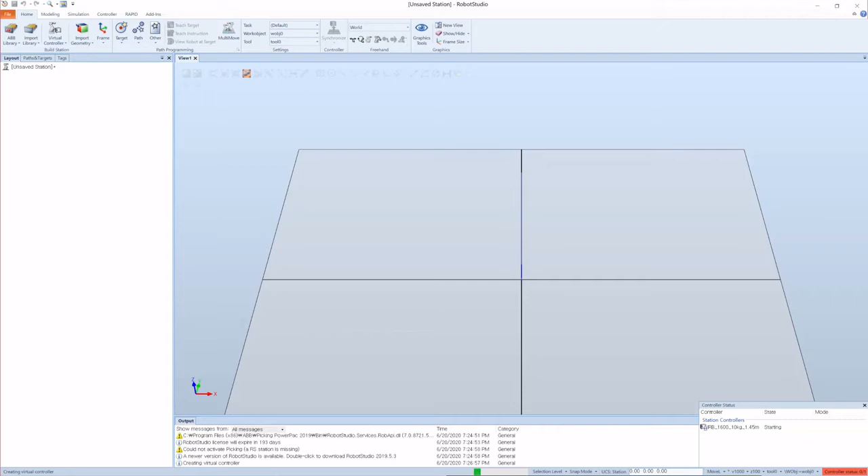So we have a Robot Studio here. Let me just make it bigger. As you see here, this is the controller. It says starting. When the controller is ready to use, there will be a green color in the controller status. So we have a robot and the controller is also started.

Let's see the basic function. Here we have the ABB library, from where you can select various kinds of equipment, the robot itself, conveyor belts and other things.

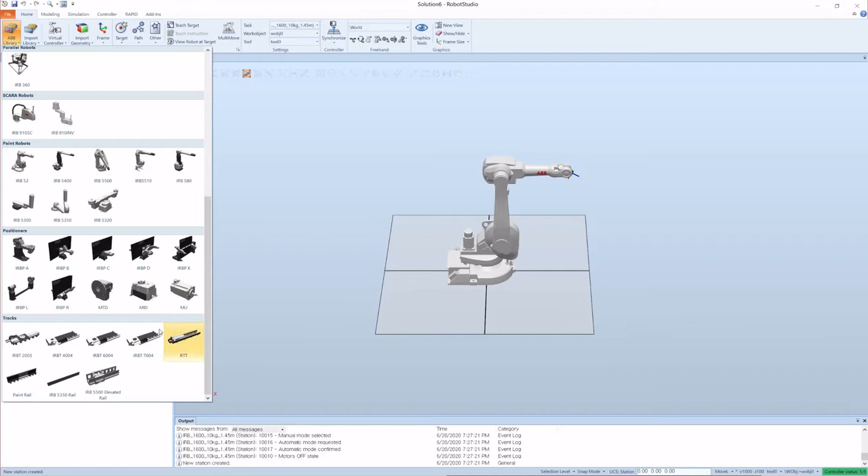We also have import library and equipment. In here you can select to make a more real environment with the controller, and any other stands, flex pendant, or other things.

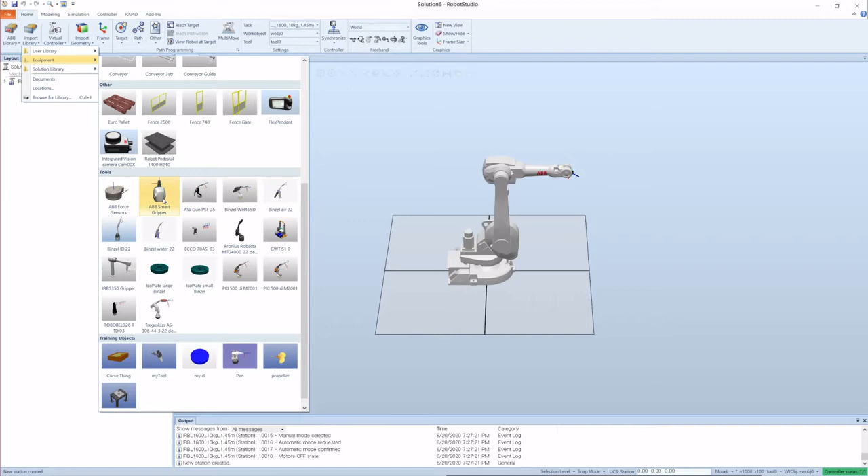What I will do is select this smart gripper, and you can choose the way you want. Servo means this one, the main body, and servo and fingers means it has the fingers, and you can select other things according to your project. So I will select for now the servo finger. I'll say OK.

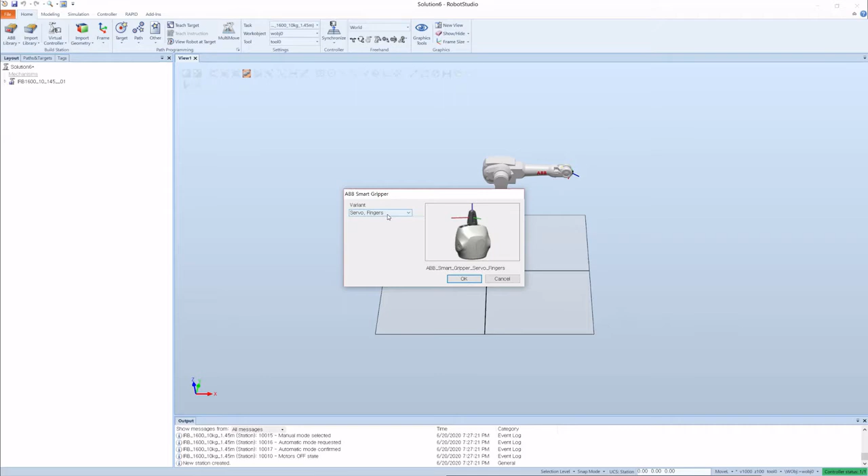So on the left we can see that this one is the robot, and this here is the servo. It is hidden below.

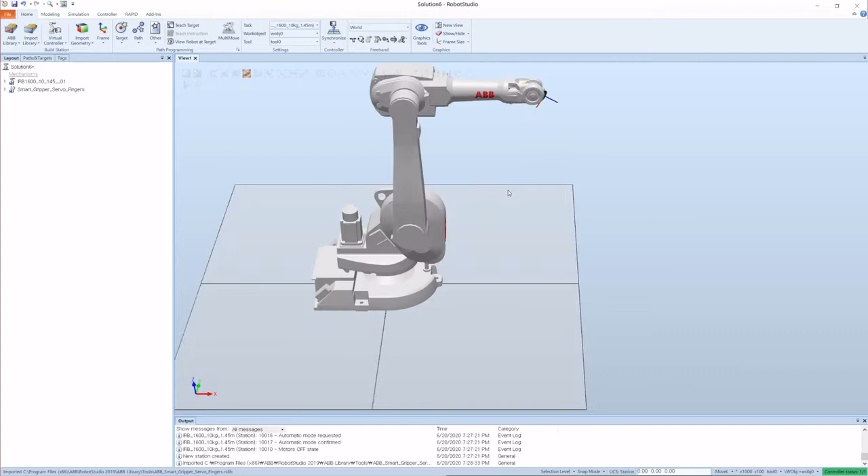To move the model in Robot Studio, I just do the scrolling, nothing more. When you scroll, you can zoom in and out. If you want to rotate the robot, you have to press Ctrl Shift at the same time with the left click, then you can rotate the Robot Studio model.

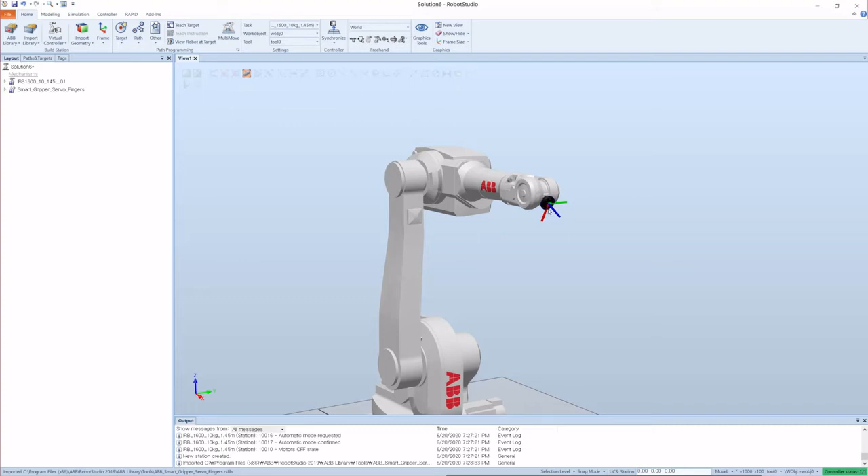And on the left here, this one is the axis. They give three colors. For example here, the blue axis is on the up, and here you can compare the axis - the blue axis is on this side, and this will become handy for later use.

And we have a virtual controller. That means you can add some other new controller also with the robot or without the robot. But without the robot, the controller is unuseful.

And here we have import geometry, so I will talk about this in the next tutorial. We also have the frame, create frames, and that might be another new tutorial.

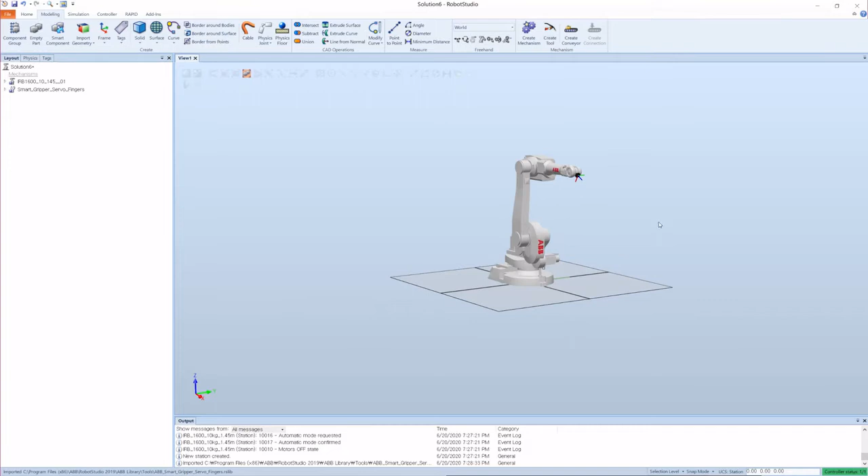We have modeling here, so you can make some basic models in here, but I recommend making models in other 3D maker software like SketchUp or Rhino or SolidWorks, and then import the models into Robot Studio. That will be more useful.

But if you need some basic elements, you can make it right now in here - like a box, cone, cylinder, pyramid, sphere - and also you can make some surfaces in here. We have a curve tool, so you can make one-dimensional or two-dimensional curves, polylines, etc. This is very useful if you are making a path.

Actually we don't usually do that, the robot will itself make a path, but sometimes you need a designated path, then you can have those kinds of lines. We have some other things in here that we will use from time to time. So the one thing I will explain is here.

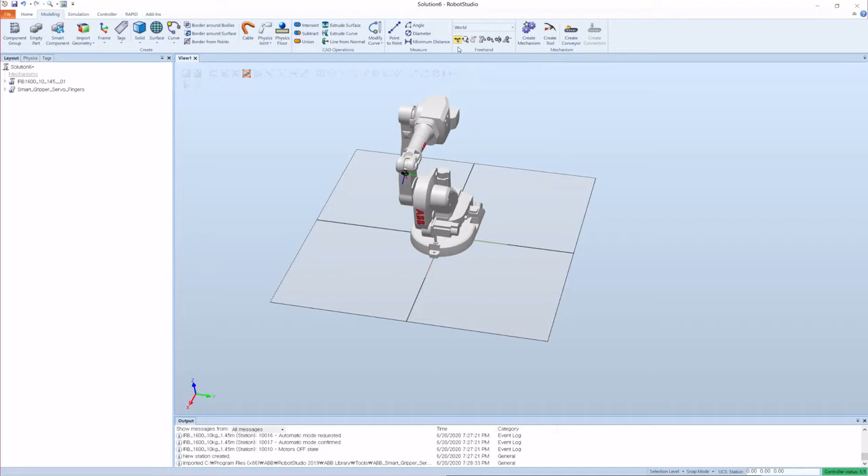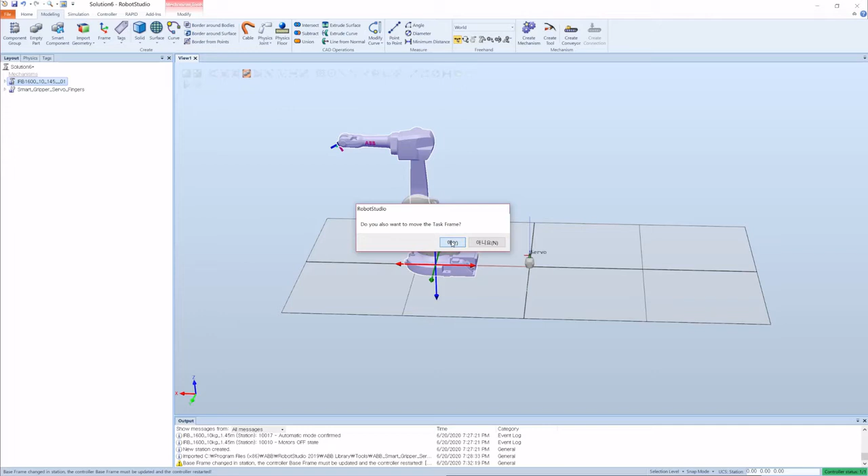So this one is for move. When you select this, let's not move the robot right now, because if you move the robot and forget something, let's see what happens. If I move the robot, it asks do you also want to move the task frame? If I say no by mistake, then later when making the path or doing animation, you cannot precisely pick up from the designated places. So either you say yes, or don't move the robot at all, just move the other body, so you don't have to worry about that. Or if you want to move the robot, you have to move the task frame also. So I said yes, but I'll just do Control Z.

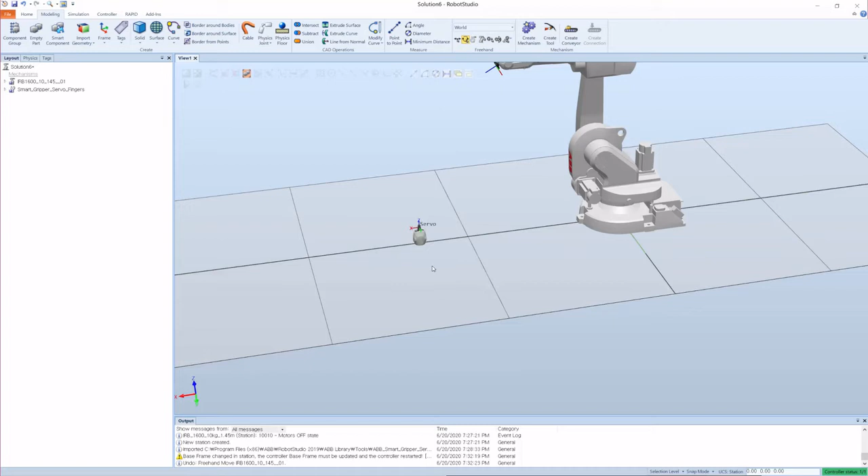So for now, let's use this one. So I move the gripper. Another option here is rotate. If I want to rotate this one, it asks if you want to rotate from here, because there is a world option. If I select local, then you can rotate it around here. And we have other options which we rarely use, as far as I know.

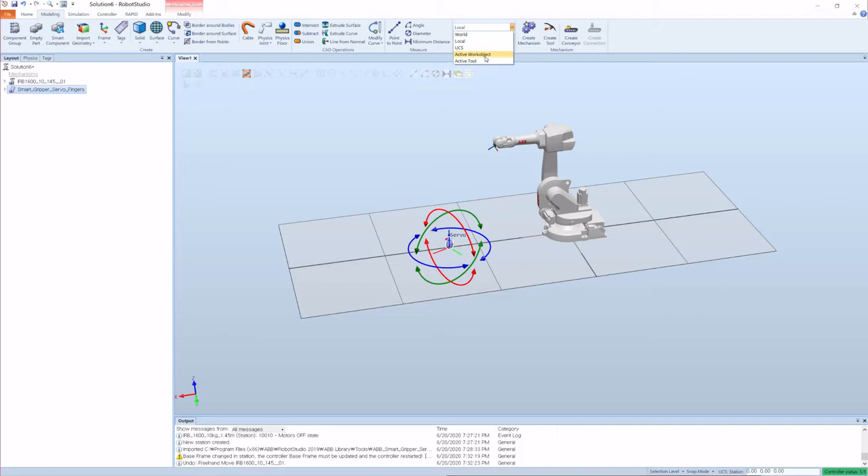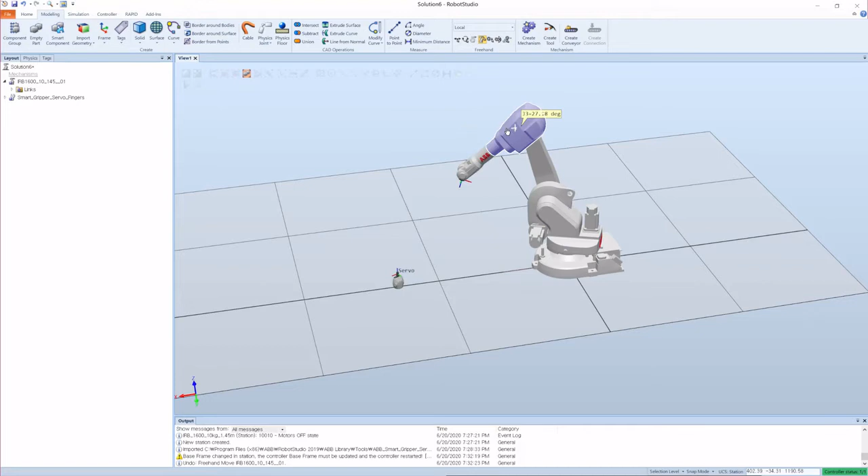Another thing I'll explain is drag. You can drag some objects in from here, and another one is jog joint, which means you can easily jog the joints the way you want to position the robot. For each axis, you can have either vertical movement or another axis the robot can really move. Let's not make it too complicated, but you know the drill.

Another one is jog linear, and another is jog reorient, and we have a multi-robot jog. This needs two or more robots.

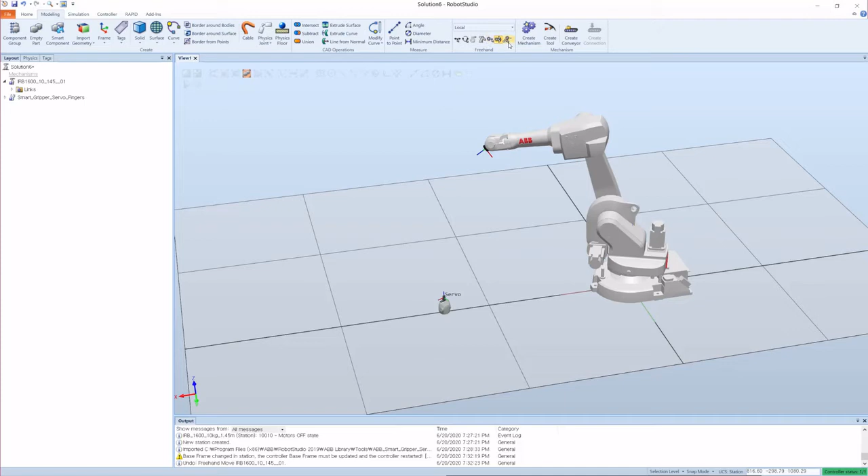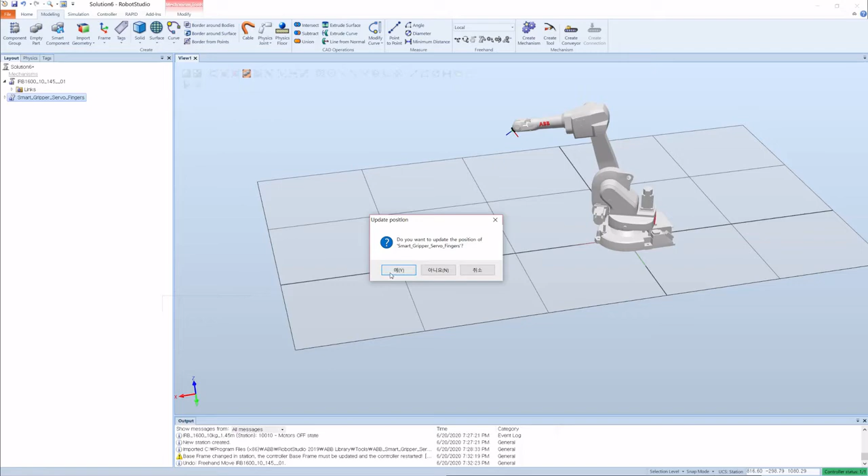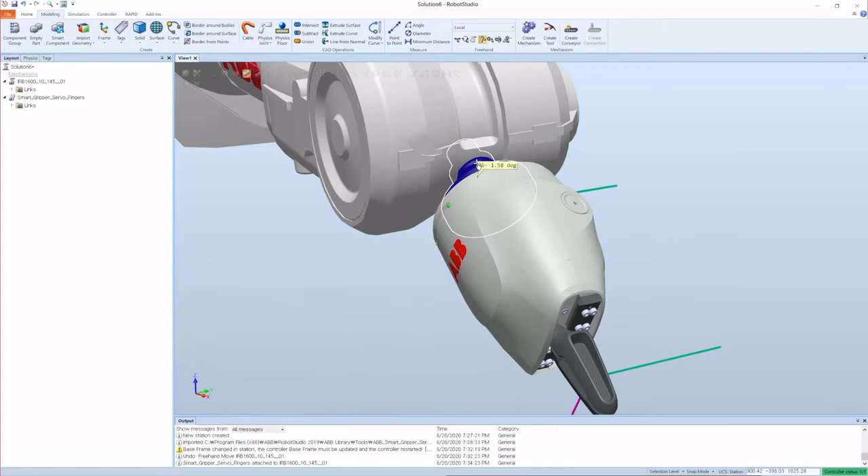Now let's connect this gripper with the robot. To do that, I'll just right click, select attach to, and select the robot. Do you want to update the position of the smart gripper? Yes. So we have our gripper in here, and if you select this one, you can actually do stuff with it the way you want, however much you want, right? And also you can open the gripper or close it.

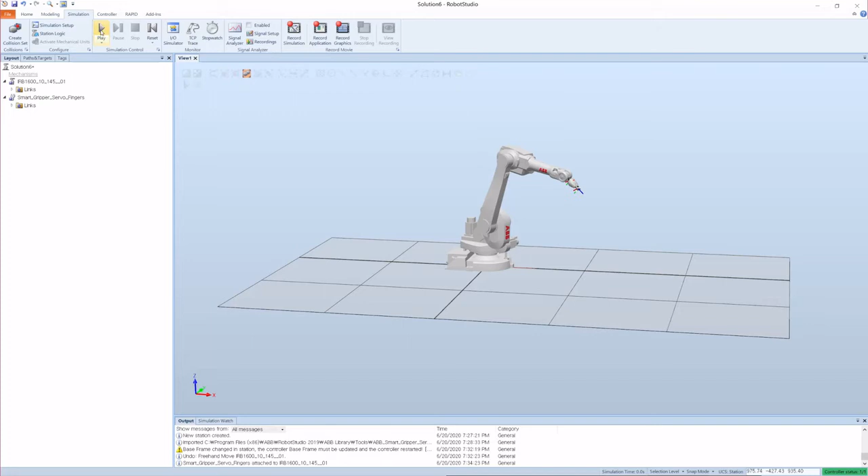So this is it with the modeling, and we have a simulation, so you can record the simulation from here. And this is for playing the simulations, which will be explained again and again later with other work. We have a controller here, and we have rapid. Rapid means that it's directly connected with the program, so when you start to really make points, then you will use rapid.

So here at the main module, this is the programming place, which we can do by the flex pendant or by using rapid. For now there is nothing here. We have a place to start our programming in here. This is the entry point of your program. So we don't have anything here, there is nothing.

Here at the Add-Ins you can add different plugins or robotware, like insert package. If you want to add robotware, you choose which robotware you want, and if you want other stuff, you can easily download it from here.

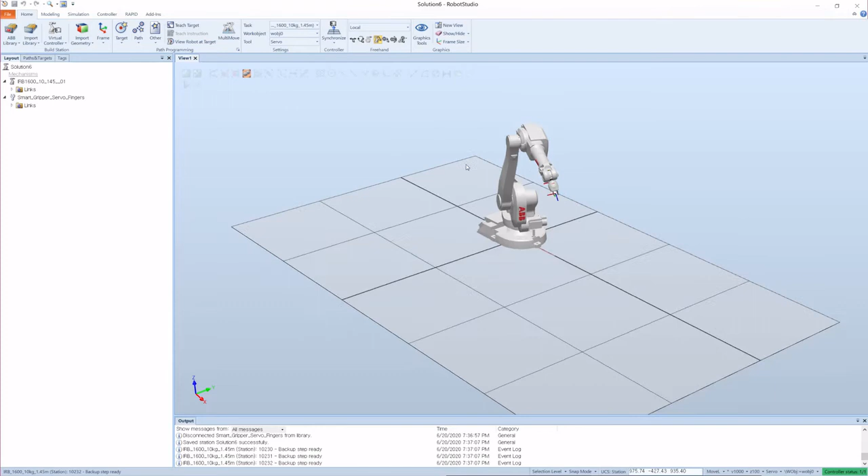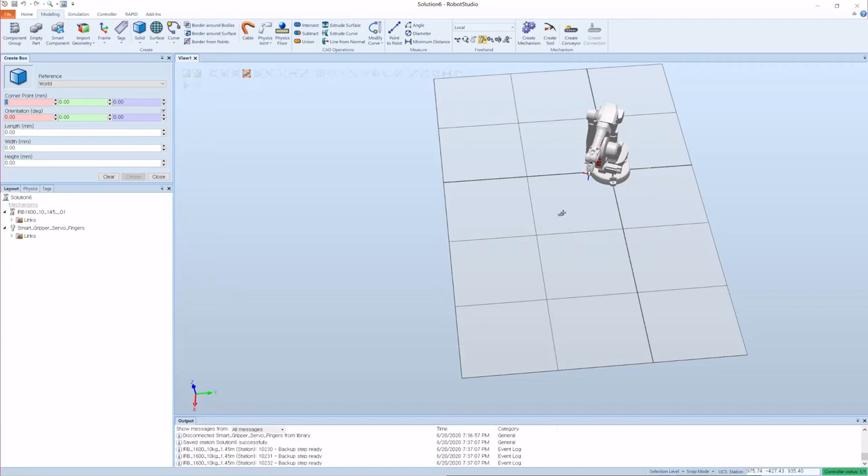Now let's make a box. So to make the box modeling, here we can make a box. The corner point is, it says we can either write here the x value, y value, and z value, or if we know where to put the box, then we can just select it after here. And if I select here, then it already automatically puts the designated place in there.

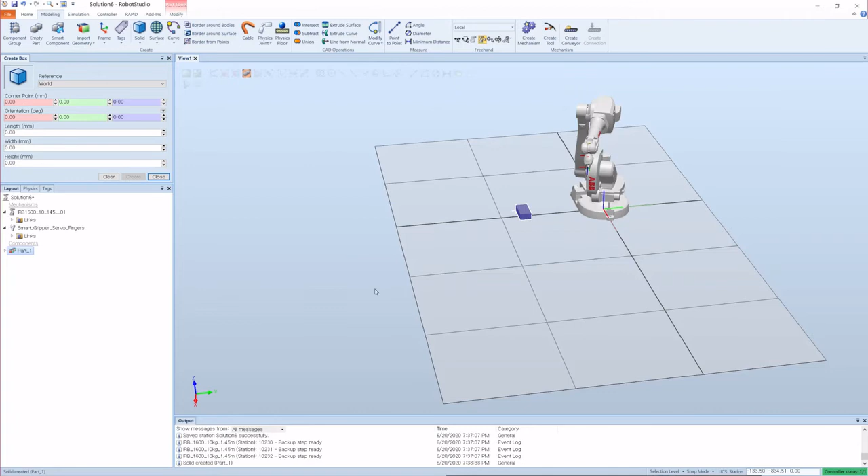So our length of the box, let's make a brick. It's gonna be 220, and the width will be 110 and 65, and we say create. So we have a brick here, and we can edit our name by renaming it, brick space 1. So this will be brick 1.

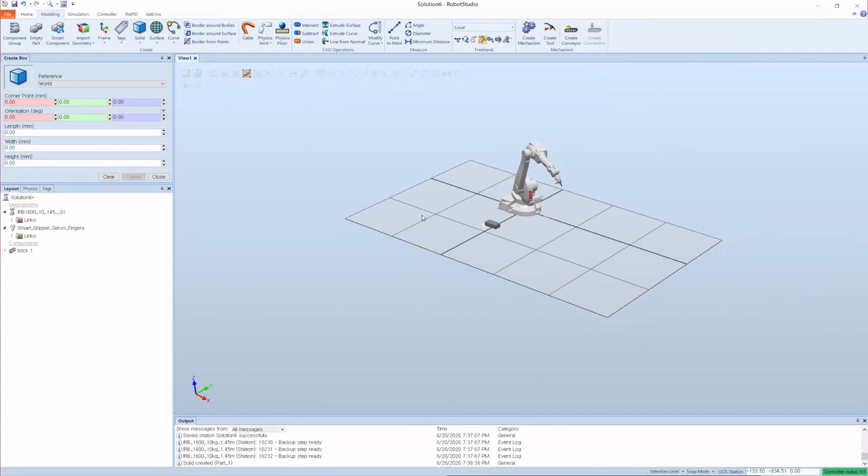After this let's just move with one path for this tutorial, and later we will use the pick and place. Another thing is, in RobotStudio you can pick the real object to make the animation, but if you are using the real robot and you need the workflow, then you really don't need to pick the objects in the animation. Rather, using the gripper and input output device is more important, as I know.

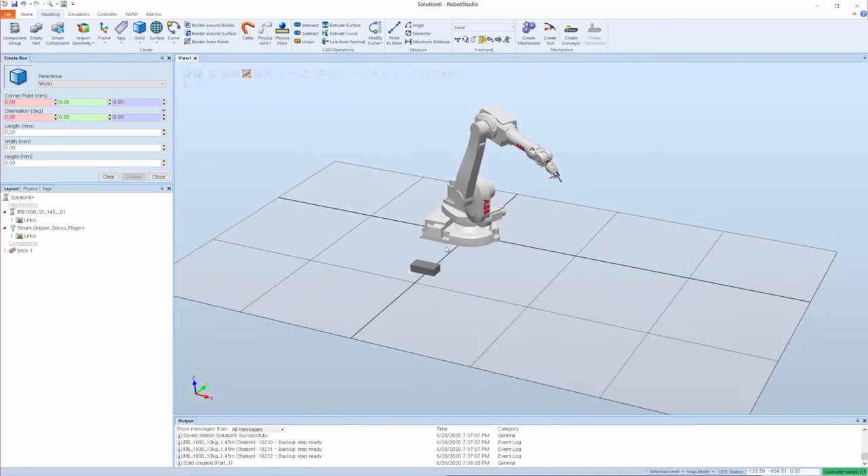So if you want to make the starting points in here, in home, if I do the teach target, then there will be a new target in here. So how can we see this? I'm gonna close this. In path, this is our robot. These are the targets, and when I click in here, as you can see, this will be highlighted. So target 10 will be this one.

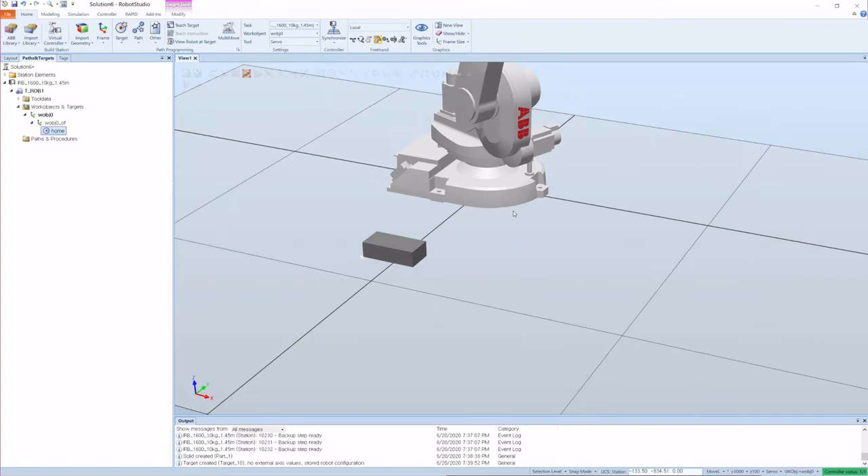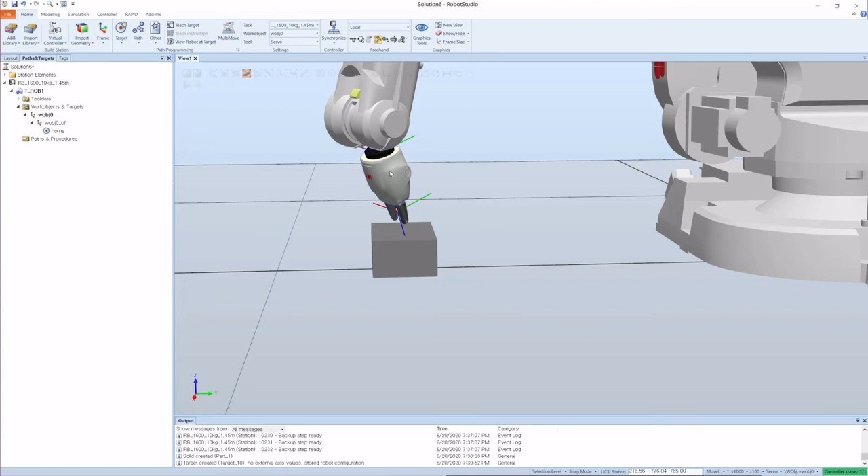So I will just rename it as home. This is home. And if we want to make another target in here, either we will jog it like this and rotate it, do this kind of stuff and make a target, which is okay, but the problem is you cannot exactly make it vertically 90 degrees when the gripper is picking up the target. So I will not recommend that.

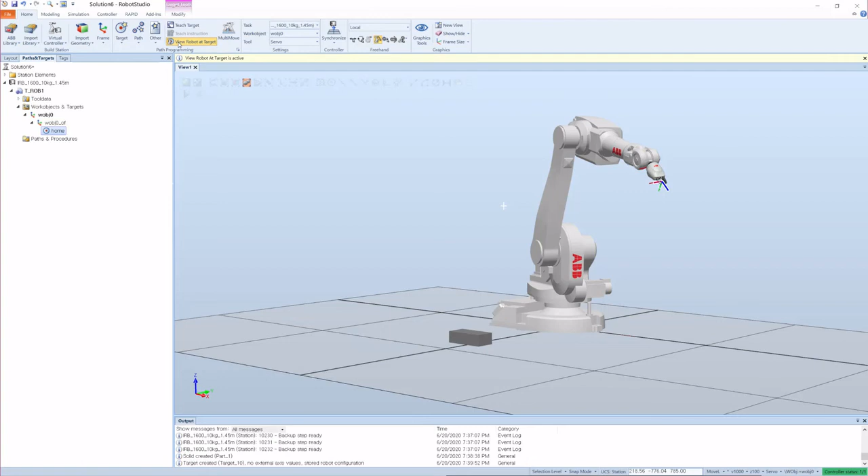So if you feel like you messed up with all the jogging, then you just click your home button and in here View Robot at Target. So what this may do is take all the robot in the same positions when it was in the target.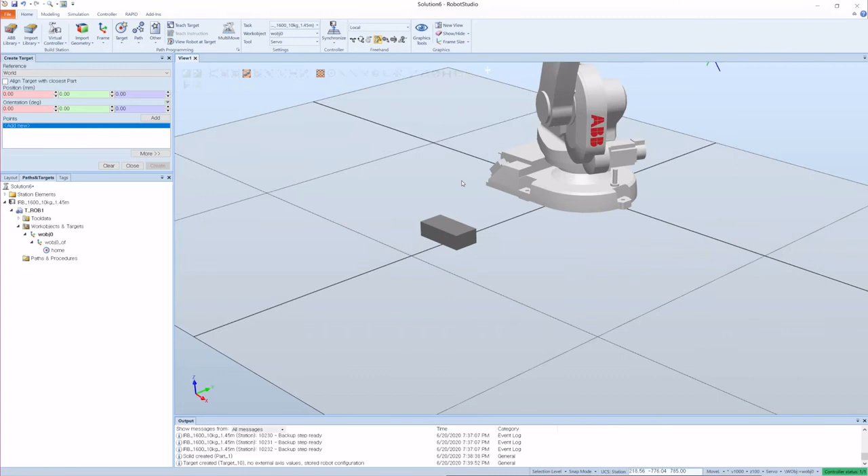So what I will suggest for making the destination point targets is, I say target, here I need to make a target and I will snap object. This will help me take a point on the block, and the position of the target. So I will click here, close, and close. So this is the target that we make above the brick where the robot will come to pick the brick.

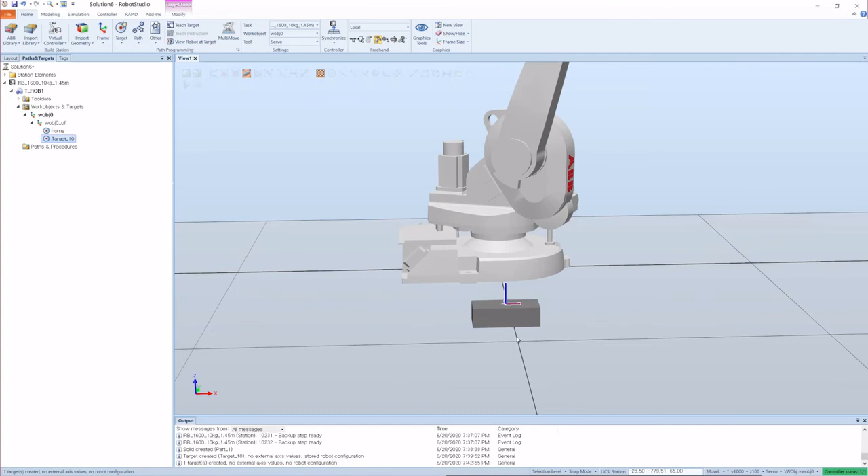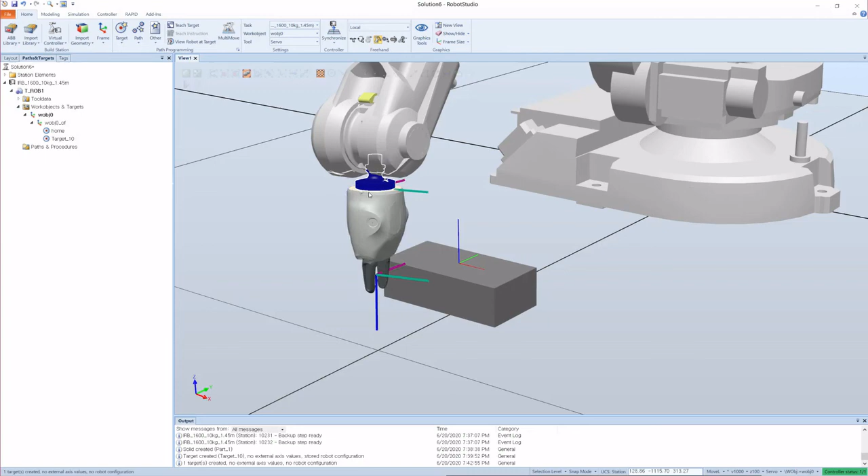So how do we want this robot to pick our brick? Let's just see, it may be like this, but since the gripper is this way, it cannot pick the whole brick like this. So we can assume that the gripper can be like this when it picks the brick.

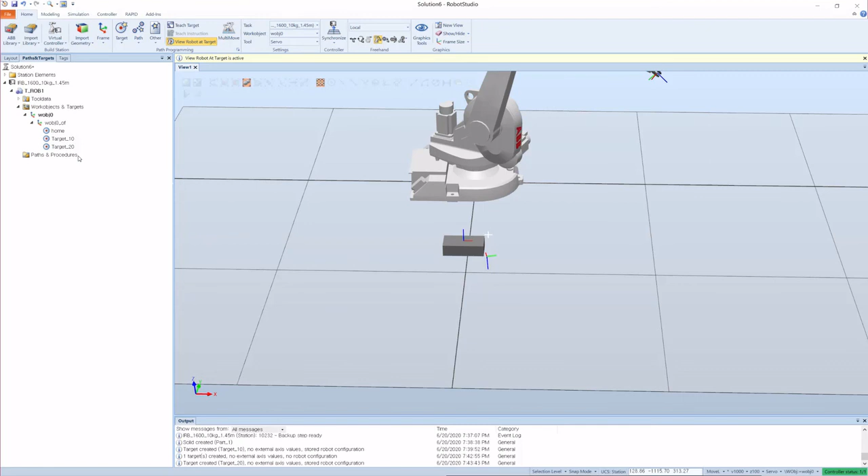So one thing that I do is take this target and go to the home, the robot will be there. The axis should be like this, the green this side and the blue this side and the red this side. This we can do after making many targets, or if there is not much, then we can do it at the first stage.

So this is our target, and if we do right click and modify target, rotate, local means from this point, so it's okay, and rotation around X and Y and Z, I don't need that. So what I do is here I will use 90 degrees and axis Z and apply, see what will happen.

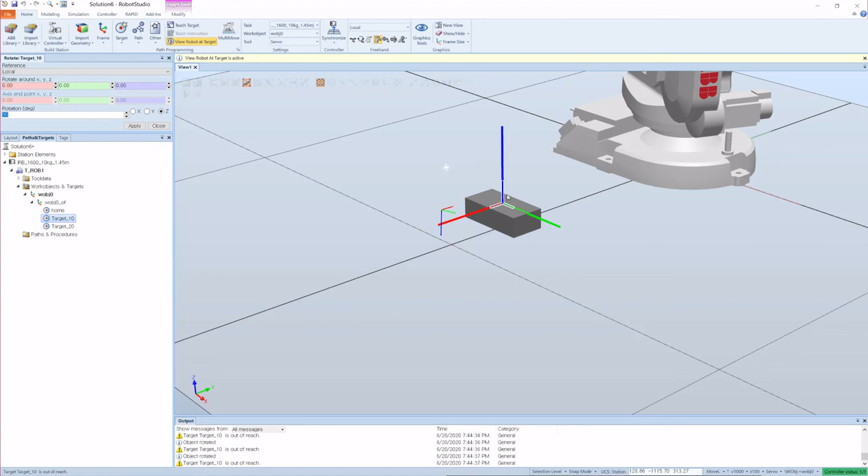Okay, so the y-axis is okay since y-axis is green, but the red axis and z-axis are not. So I will put y-axis and apply. So now every axis is the same from this one, and I will say close.

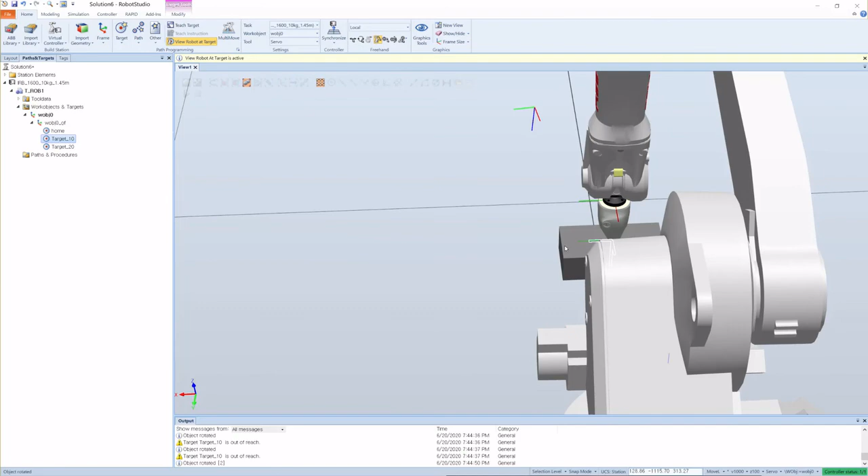So as you see, the robot will pick the brick like this, and like this we can add many targets and the way we want, or there are other options also which I will explain later in another tutorial.